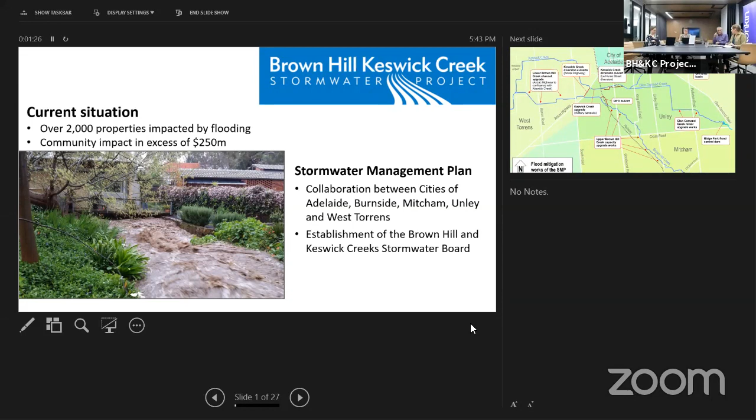In terms of implementation of the stormwater management plan, flood mitigation is the key objective, but not the only one. There are important environmental and community benefits identified within the plan, such as improved quality of stormwater discharged into marine waters, reuse of stormwater for greening of urban open space areas, creek rehabilitation, protection of biodiversity, and significant opportunities for improved recreational amenity throughout the creek network.

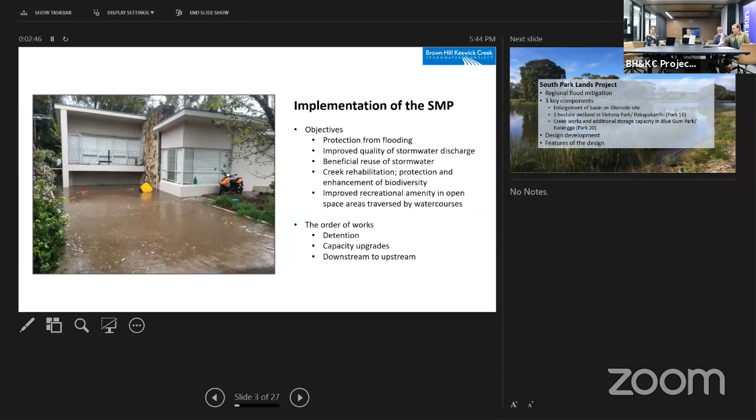Looking specifically at the South Parklands project, it has 3 key components. The first is the enlargement of a basin on the Glenside development site, which is being delivered by the Glenside developer, sitting separately from what the Brown Hill Keswick Creek Stormwater project is now delivering. The second and third components are what we've looked at today: the wetland in Victoria Park and the Park 20 creek works.

The 3 components should really be considered as a larger piece of work which together reduce the flow of stormwater in Parklands Creek to a level that can be accommodated both within the Parklands and in downstream areas. In terms of design development, this project has been many years in the making, both for the Brown Hill Keswick Creek Stormwater Project as a whole and specifically for the South Parklands component. A 2006 master plan initially proposed 6 temporary storage basins in the South Parklands, and over time that evolved into the plans we're now looking at in Park 16 and Park 20.

I'll hand over to Robin now, who's going to go into more detail about the wetland design, including some of the features and the tree impacts. So we'll hand over to Robin.

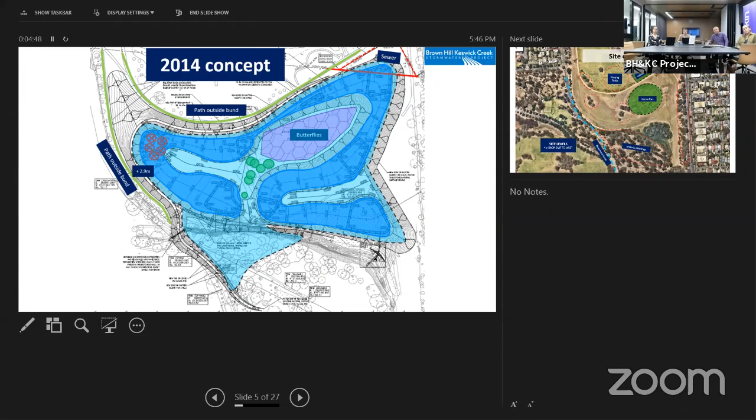What we've done is try to consider the site constraints and see how many trees we wouldn't need to remove. Also, one major consideration is reducing the net export of earth from the site - there's considerable volume that needs to be excavated, and reducing the amount of off-site disposal is pretty important. This plan gives you a quick idea from above of some of the constraints: the butterfly conservation area, the native grass area, and the historic plantings along the southern bank of Parklands Creek at the bottom, where we walked along this trail.

We have Beaumont Road and the new bridge, the crossing. Some beautiful trees through here. In addition, there's two lovely groves of trees, the two we walked between, and we walked up through here. Then there's playing fields to the north, and another grove of trees out here to the northwest.

So I guess in general, it's worthwhile considering that we're trying to do a lot in this space. We're trying to achieve a number of different objectives, not just flood control, but enhancing the biodiversity of the area, but also giving back a big recreational asset to the users of the park.

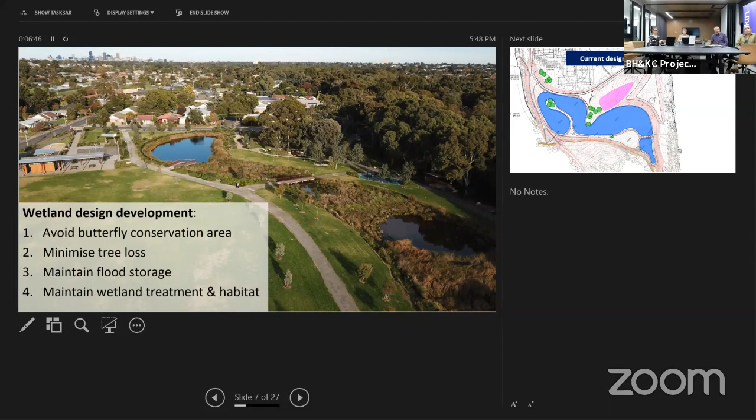So the focus in the last couple of years of the design development has really been around the butterfly area, reducing tree loss, but maintaining the functionality. The scale of what we're trying to do here is pretty impressive - something like 100,000 cubic metres of flood storage, which is pretty significant, and then a 3-hectare wetland, which is not small at all. We're trying to push it pretty hard, and we believe we've tried as best we can, and hopefully what we can do is explain a little bit of our thinking.

So this is the current shape of the wetland, and the way it operates is Parklands Creek will flow into what's called an inlet pond. This is a relatively deep pool of water, 1.5 to 2 metres deep. The idea is that flows will come into that area, the coarse sediments will settle out into the base of the area, and it also regulates flows into what's called the macrophyte zone of the wetland, the main area of the wetland, which is this area through here.

This area regulates the flows so that if a very big flow comes in, flow will bypass over a weir and flow down Parklands Creek, avoiding scouring the vegetation in the wetland.

The wetland itself, as I mentioned on site, is predominantly quite shallow, 100 to 300 millimetres deep, and is planted with bands of vegetation that go perpendicular to the main flow path. The idea is that the water coming into the wetland needs to interact with the vegetation and therefore have the treatment system. Interspersed along the macrophyte area of the wetland will be some deeper pools, and these are for habitat, for refuge for mosquito larvae predators, as well as other aquatic animals.

So the wetland itself, flows will move around this area very slowly, taking 2 to 3 days to drain through the wetland, and it'll get to this point, and then there'll be a pipe with a pit, and within the pit is a flow control structure, which just regulates the rate at which flow leaves the wetland.

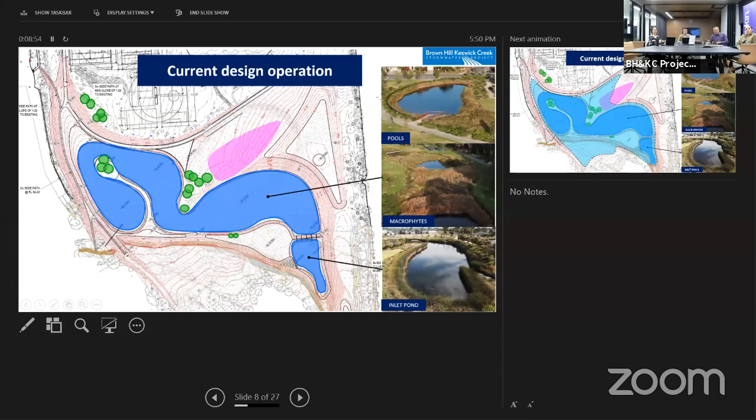The flood embankment, you can see with the contours in red here, encapsulates the whole area to maintain a constant level that allows water to build up behind it in rare, very rare events. This is the 100-year event, which means the water will pond up to 2.5 to 3 metres deep in those areas, and then over a matter of hours will drain back down to just the wetland area itself.

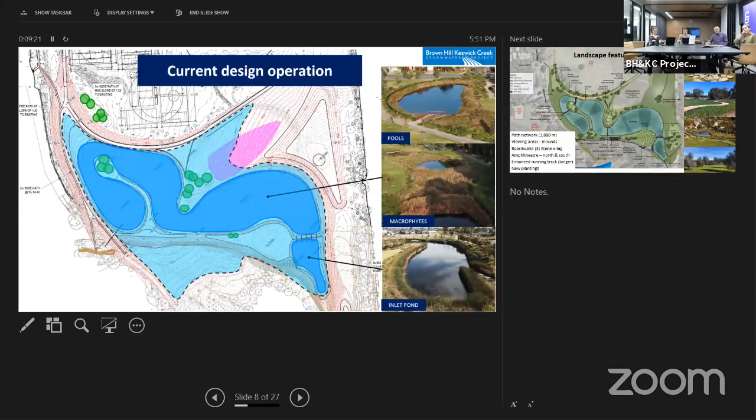So that's the main function of the wetland. You can see here, in addition to just the function, there's a heap of landscape features which we've introduced. There's almost 2 kilometres of walking path network, giving people a variety of experience. There's a DDA compliant path which goes all the way around the perimeter of the wetland, offering views from viewing areas, resting areas, and in addition there's a secondary path network where there's a couple of boardwalks.

You can move through the grove of trees, and then there would be a series of stepping stones that you can cross, and kids can get involved in getting down there and listening to the frogs and so on. So there's a variety of experiences which we're offering up.

In addition to that, there's some viewing areas where you can have amphitheatres, and the vision for that is for things like school groups to go there and get some educational activities about how wetlands work, the importance of aquatic animals and so on. Another component is the running track.

It's actually a little bit longer than what it is at the moment. I understand it has been shortened over the years with modifications around that perimeter, but it's now going to pass along the top of the flood embankment through this area, and it gets a little bit longer, but it will also have great views to the south, looking over the wetland.

To the north of that bank is the sporting fields, and the batter here is quite mild, 1 in 6, and it's been designed so that it can form a bit of an amphitheatre to watch the kids play sport on a Saturday morning.

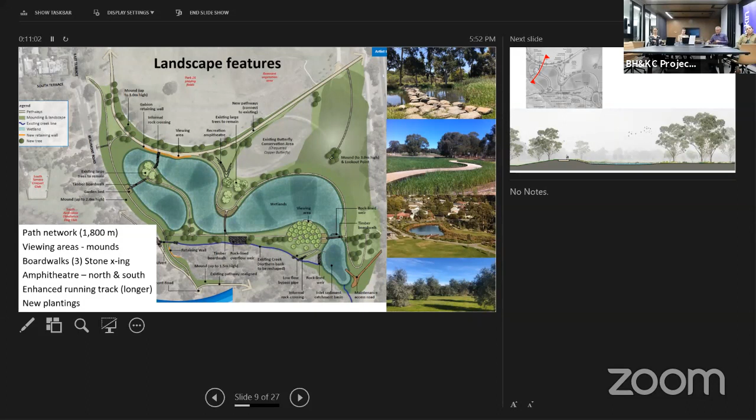So to give you an idea, this is the section looking from the sporting fields across to the car park. You can see where we have the running track up on top of the bund. We're then going to use a couple of gabion baskets to try and reduce that batter width from the top of the running track down into the wetland.

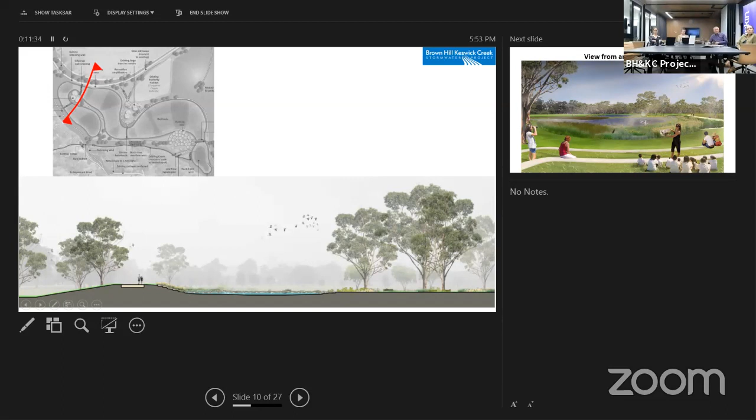And on the northern side is a much milder batter, which will form that amphitheatre. A couple of artist impressions of how it might look with a teacher teaching about butterflies or frogs or other. But there'll be some fantastic vistas around, particularly given the huge stand of existing trees to the south

of the wetland system. And so, just by way of an example, this is a project we designed a few years ago in Norwood, St. Peter's at Felixstow Reserve. This was how it looked before the works were done, and this is how it looks today.

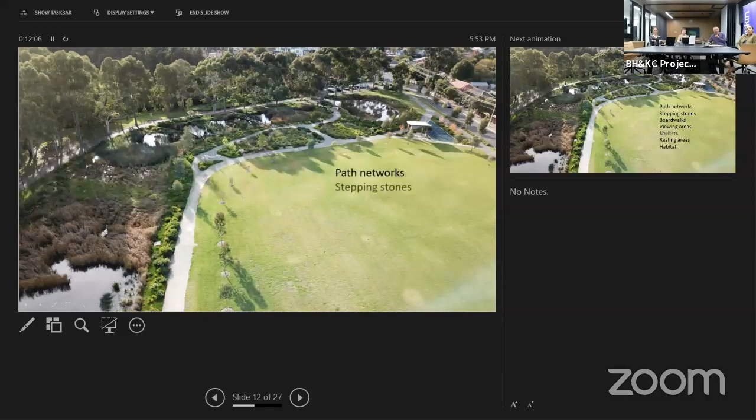And it has a lot of similar kind of landscape features of the path network, the boardwalks. You can just see some stepping stones up in this area. You can also get a sense of the variety of vegetation that it brings to the park in terms of the biodiversity and the habitat

values. Obviously, as part of the recent work, we tried very hard to minimise any tree loss. So an arborist was brought in to do a tree assessment, and they have a series of retention ratings that they determine based on their scores for the tree structure, the height, its habitat values, linkages to other trees, and amenity values and so on.

And that work comes back with 4 categories of either important, high, moderate or low. Clearly the important and the high category are the ones that need the most compelling reasons for removal, and they're the ones we focused the hardest on in terms of trying to retain.

So a summary of the trees that we're proposing to remove at Park 16 shows that there's 33 trees, not including the Poplar Grove, and 2 of those are regulated trees. One was in the wetland that we looked at, and one was along the northern bank of the creek.

So I'll talk now particularly about the tree in the wetland. We also have a lot of supporting information if members want to discuss any of the other trees, and we can talk about that perhaps during question time.

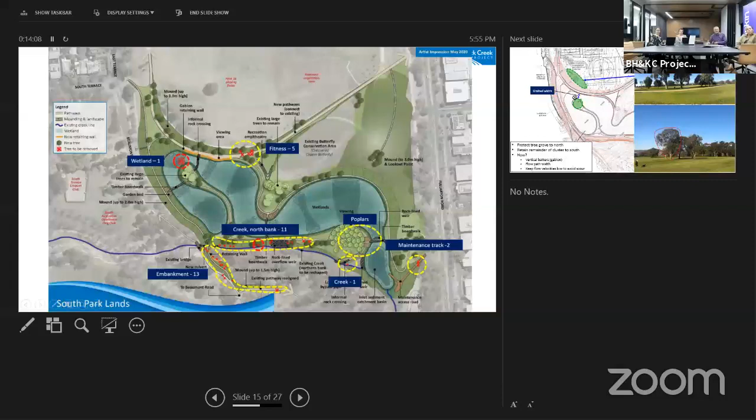This is a summary just to show the groupings of trees and where the main tree removals are, and the red circles are the two regulated trees that we spoke about on site. So we've got more information on all of these trees that we can take questions at the end of the presentation if need be.

But in particular, the tree I'd like to just spend a little bit of time on, now I've forgotten the number of it, I think it's 61, but it's this tree here, which is this guy that we looked at on site.

And one of the main constraints we have is for wetland function, we need to maintain a minimum width of wetland, because that, if it gets too narrow, the flow velocities get too high and we scour out the vegetation. So

why can't we make this any wider? The problem is when you look at the running track here and the required batter at 1 in 6, we start to impact another grove of trees to the north. So we can't essentially push it any further north.

If we came any further south, with the normal 1 in 6 batter, we'd almost run all the way into these trees. So what we've done is use some gabion baskets to create a near vertical edge, which allows us to maintain a minimum width. And therefore, the width here is about 10 or 11 metres.

And I certainly wouldn't feel comfortable making it any narrower than that. So that's the constraint we're faced with. On the balance of it, we do get to maintain or keep these other trees, and it creates a kind of lovely vista in the middle of the wetland.

And yes, we did think about keeping the tree as a stag, if you like, in the wetland, but there's the construction constraints of trying to create the impervious barrier made of clay across the base, which we did speak about on site. So that was the main reason that one is earmarked for removal.

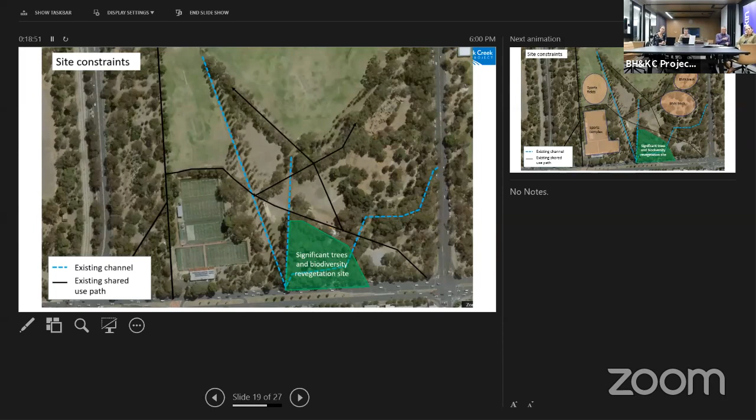We've got the significant trees and biodiversity revegetation site. That green area is the revegetation site. The significant trees extend further upstream along Park Lands Creek.

We've got a number of sports facilities. We've got the BMX track, the sports fields to the north, and we've also got the hockey and tennis courts in the southwest corner. There's also a number of structures associated with tree climb, which are in close proximity to the proposed works.

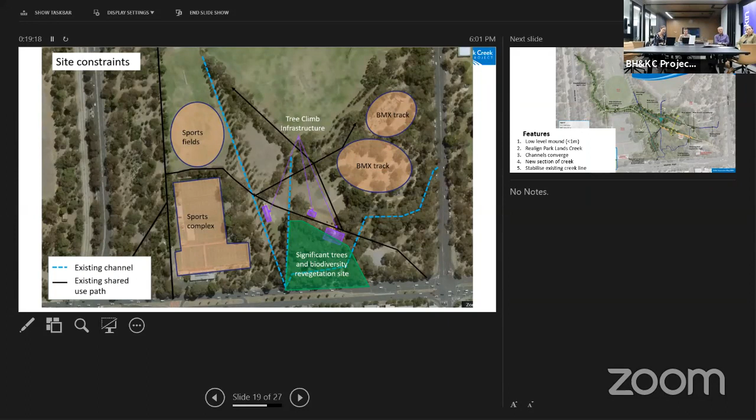So the features of the design, as discussed on site, we've got a low level mound, less than 1 metre, and to be effective at retaining those flows, the mound needs to be continuous, and it extends from just east of the tree climb facility, generally follows the alignment of an existing shared use path, threads between the ovals and the tennis courts, and then it heads in a northerly direction.

And just note the shape of the mound, particularly it's most evident in the western section, where instead of a straight line, the mound has been designed to avoid tree impacts. So we've got the arborist assessment, which we'll talk about shortly. And we've been out on site and tried to work out the path of least resistance, shall we say, in terms of tree impacts. And that explains the shape of the mound.

And you can see, for example, this section here, the mound deviates quite significantly because there's a large eucalyptus tree in here that we are trying to protect.

Another focus of the design is, so there's the mound. Another focus of the design is realigning Park Lands Creek. So Park Lands Creek currently weaves its way through these significant trees. The creek in this section is heavily degraded, very eroded, steep banks, significant trees right on the edge of the banks. If we were to do any works in this area, it would result in significant tree impacts.

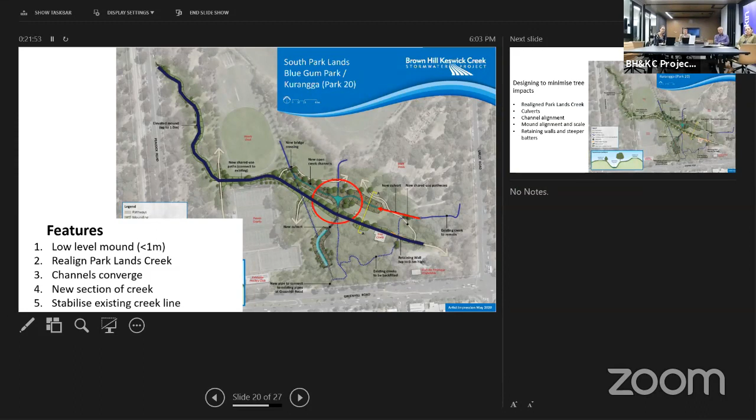As mentioned previously and as discussed on site, there has been a significant effort involved in trying to design the works to minimise tree impacts whilst retaining that flood mitigation benefit. We've spoken about realigning Park Lands Creek, and about the mound alignment and weaving it through trees and other site constraints.

Also note the use of retaining walls. In areas where we're very close to a site constraint, such as significant trees here, we're proposing to use retaining walls, and this allows us to reduce the footprint of the path and thereby minimise tree impacts.

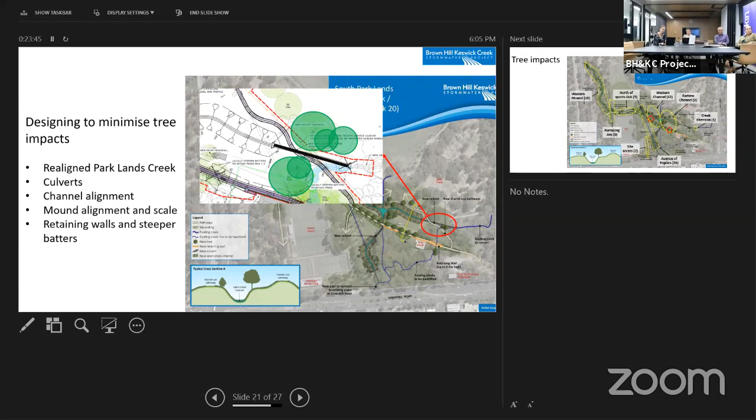Here is the summary of the trees that are proposed for removal. You will note that when we presented the design 2 weeks ago, we were proposing to remove 2 trees which were designated significant. One of those was incorrectly designated as significant and it is actually unregulated. The second one is tree 96, and we've gone back and re-looked at the design - by using a retaining wall and pushing the pathway further north, we think we can retain that tree, and that's what we're now proposing to do.

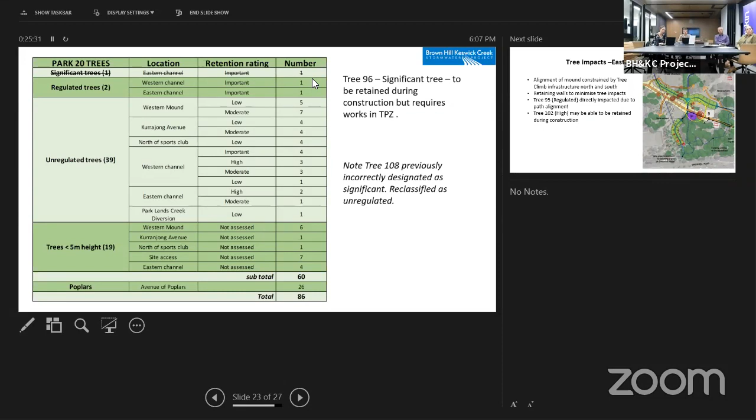So you can see that there are 60 trees, but only 2 regulated trees, and the remainder of the trees are unregulated, with a number having low or moderate retention rating.

It's also noting that during construction, we will be putting in place efforts to maintain trees, and tree 102 for example, may be able to be retained during construction, depending on what they find in terms of the root structure. We saw tree 96 out on site, it's a large tree, it's a beautiful tree, and we will be proposing to retain it.